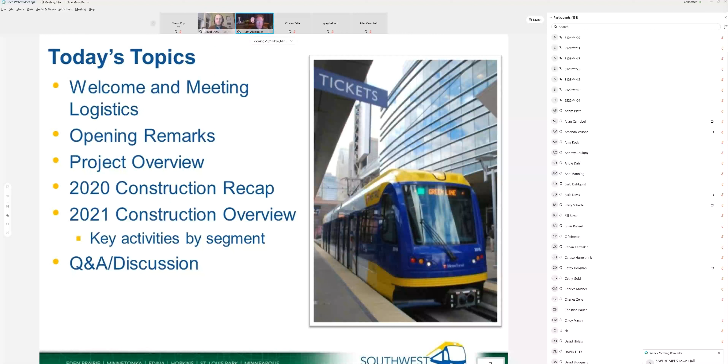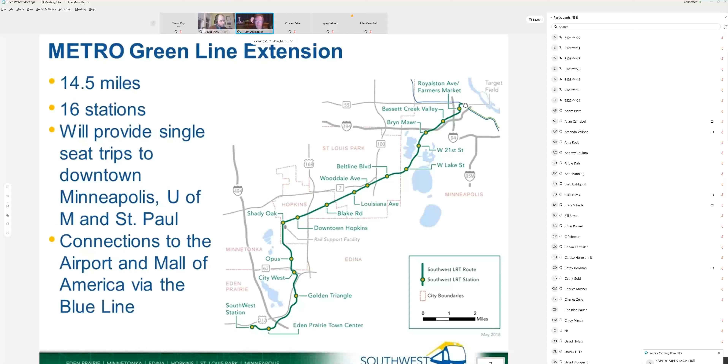We'll take a few Q&A as we go through, then have Q&A after we're done. As for meeting logistics, I'll just get right down to it. This is a familiar slide to a lot of you: 14.5 miles, as the chair mentioned, 16 stations, and what we're building. We're really focusing tonight on the Minneapolis area, so we'll get into where we are right now.

Looking at this LRT construction sequencing process, we really start underground, working at utilities, and ultimately lead up to testing. We're kind of in the middle of things right now with building structures, getting stations up, and working on track.

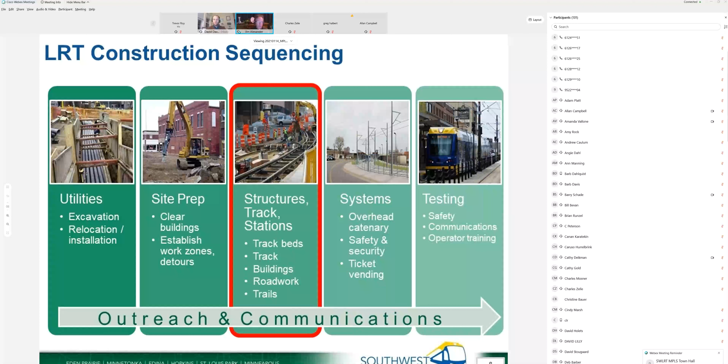And that'll be kind of the theme as well for next year. I'll go into highlights of 2020.

Just as the chair mentioned, we did receive the full funding grant agreement, the FFGA, in September. That was a big milestone for us.

Overall, the project is about 35% complete on construction. As the chair mentioned, if you have a chance to go out and look at the western suburbs, you'll see a lot of bridges out as you maneuver toward Eden Prairie.

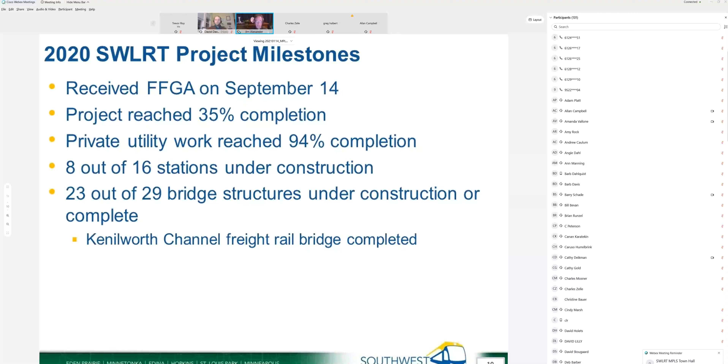One big piece we've accomplished is the private utility work. This is kind of a culprit, if you will, that really plagues projects like ours, and we're pretty close to 95% done with utility work. That's a big milestone for us. You can see the other stats here, as the chair had mentioned.

So we'll start from west to east. This is familiar for some of you - excavation of the Kenilworth Tunnel. We're going to talk about this tonight in terms of where we are heading in 2021. This is essentially the first cell construction being constructed.

You can see the waler, the struts here, and the walers on the side. So what you see is the sheet piles that have been driven in through here. We're pretty close to being done with all the sheet piles - should finish that up in February.

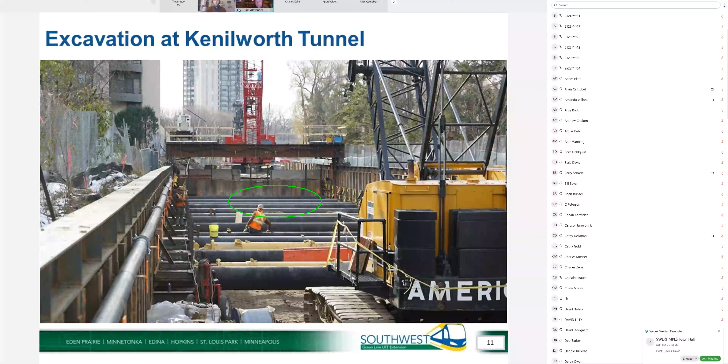We do have a segment that's next to the Calhoun Isles Tower and the garage that we're going to talk about. The Secant Wall you've been hearing about - some of you have been hearing about it - but that's the work on that tunnel thus far.

So, freight rail work - quite a bit of work has been done thus far. We shared a slide similar to this when we did the freight rail safety review back in September of 2020. Areas in green are the freight pieces that have been completed thus far, and in yellow are still to be done. We have the area where the tunnel is going, where we shifted the track to the east a bit.

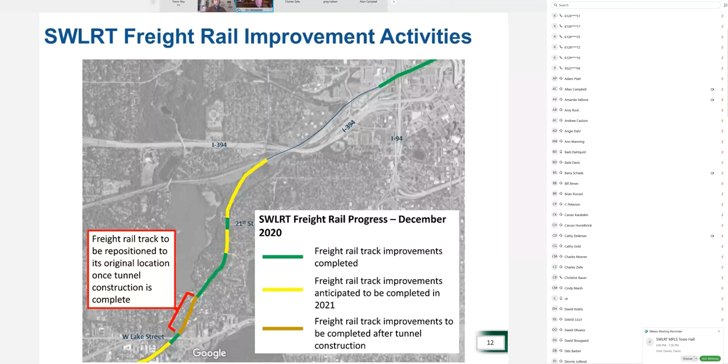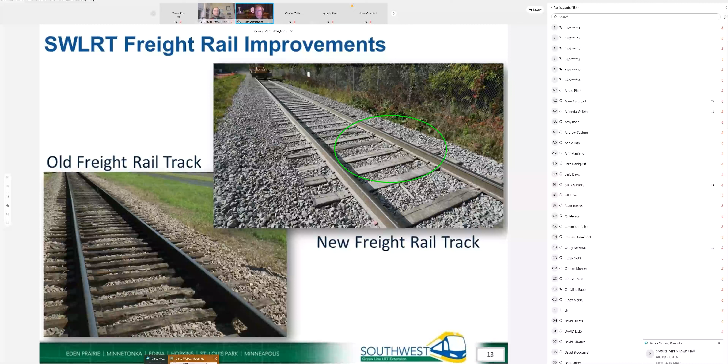We'll be shifting that back once the tunnel is all constructed. Here's an image of what that looks like - you can see the old track here, and the new track improvements with the new rail, the ties, and the ballast.

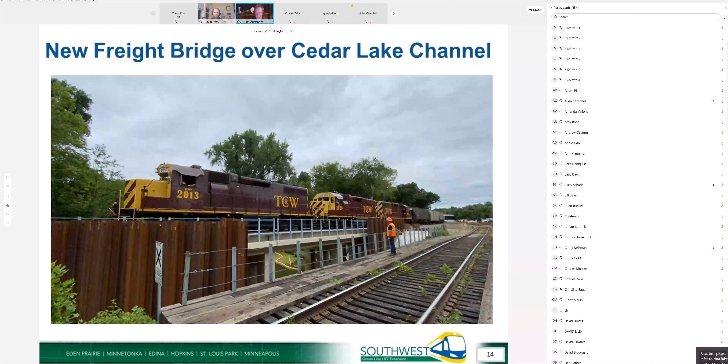So we really believe we're improving the freight rail infrastructure as we're building the SWLRT as well. This is a new freight bridge that goes over Cedar Lake Channel.

That was focused a lot of activity - I know a lot was disruptive with the pile driving on that. Where this inspector is standing, we're working on a bridge at about this location for the LRT bridge that's getting underway, and I'll talk about that as we get into the 2021 slides.

We're over near Glenwood. I wanted to spend a little time on this image here and focus on these areas. This is where the Glenwood Bridge was formerly located - it used to go across right through here. So we had to take that out to build what we're working on here.

We have retaining walls under construction on the north side, and we are currently building the bridge piers for the LRT bridge. At the end of the day, once this is all completed, there will be three bridges here.

There's a roadway bridge on the east side of Glenwood, the LRT bridge that will come through it - it'll be the same roadway grade as the roadway bridges - and then there's the west component of the Glenwood Bridge that ultimately will be built.

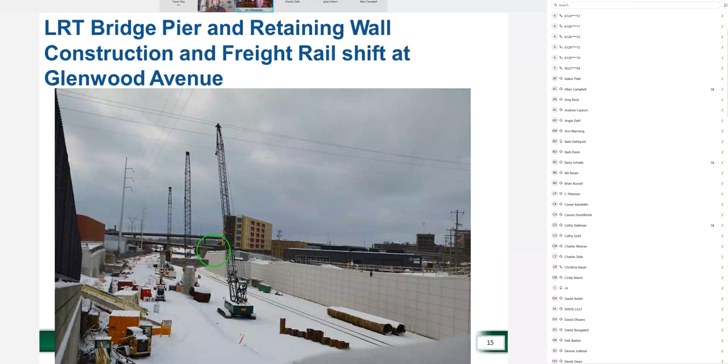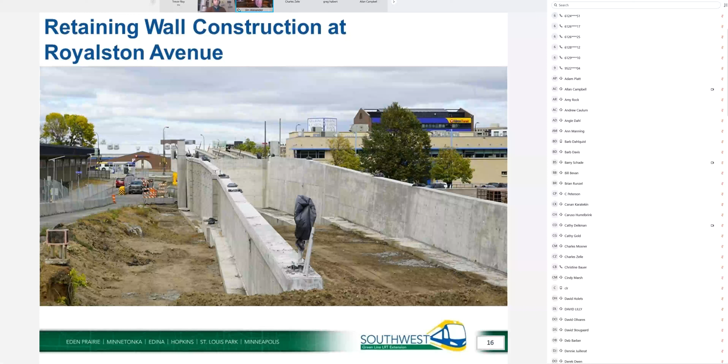Here's an image just north of the future Royalston Farmers Market station near downtown. We have a lot of retaining walls through this area, and off in the distance you start a bridge structure that goes over 5th.

This is another image where you can see Target Field in the background. This bridge structure will end up carrying LRT around Mary's Place and all the way over to Target Field Station to link up to our existing system.

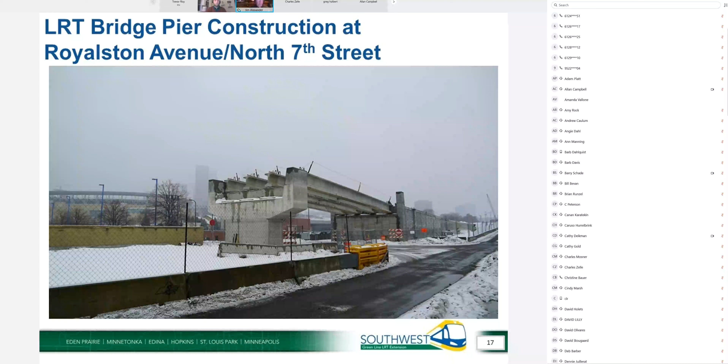In terms of construction communications, see the stats here. We've got nearly 17,000 subscribers, 46% open rate - a pretty good percentage, I'm told, by our outreach and communications staff. And number of hotline calls, 140 from Minneapolis in 2020. David Davies can attest, he's fielded many more calls than that, non-hotline calls and emails that we continue to receive and respond to.

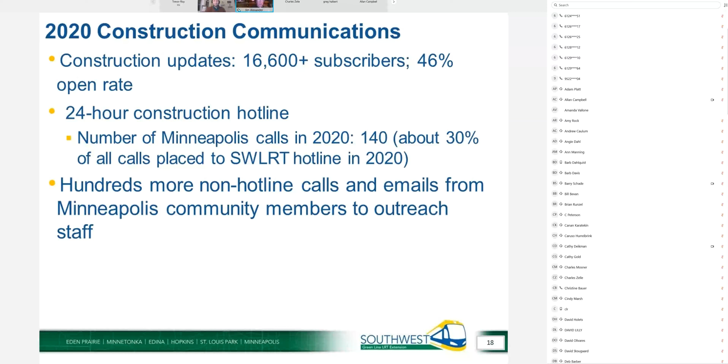So we'll get into the 2021 construction activity as we currently see this work laying out. We're going to work from east to west, starting out at the Royalston area, and I'll start with... let me see my slide here.

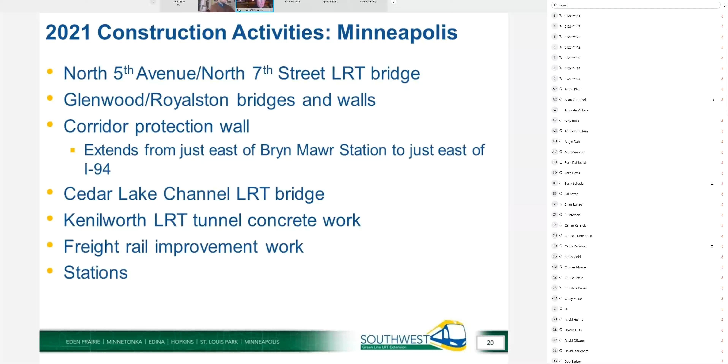So we're going to talk about some of these maps here, where I'll show a few of these and get you oriented on what all the symbols mean. The intent is to show areas where there's going to be more impactful activity. We're really looking to have activity along the whole corridor through Minneapolis as well as the other cities, but these are intended to show in blue where pile driving will occur, and in violet, where lay down and staging areas continue to be. We also have a symbol in pink - this is essentially a haul route, going along the whole corridor here.

And probably should have backed up - the green line and the yellow circles denote the line for Southwest LRT and the stations. So at the Royalston area, we'll have for that bridge that I talked about that goes over 7th here and makes its way into Target Field Station.

We'll have some pile driving happening in the spring and summer to finish out the piers on that bridge. As we progress towards Royalston, we have some laydown area up in this location, and we'll also be doing some work on the station itself, as well as retaining walls through this area. So there will be some pile driving activity up in that reach.

As we move down the Glenwood Avenue Bridge, one thing I want to point out is that we had anticipated to have this bridge up and running for our vehicle traffic later this year, and that is not going to happen given where we are with our schedule. We'll talk about the corridor protection barrier here in a minute - it's kind of coupled with that, but we are looking at least a year delay for that bridge. So we're focusing on 2022 to get those 3 bridges constructed and back in operation.

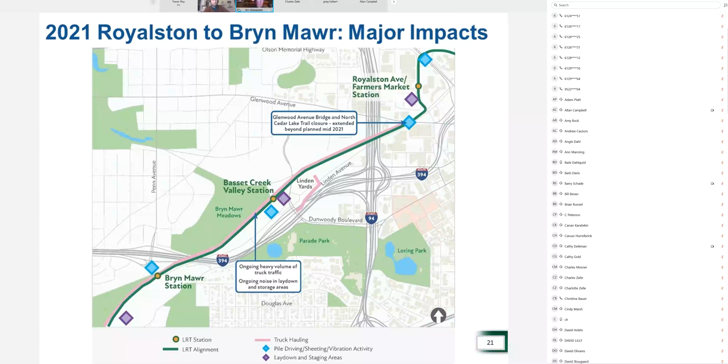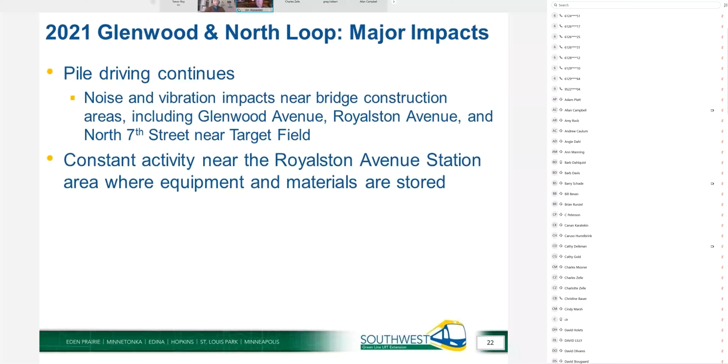So this is just a recap of the noise and vibration activities in the Glenwood area, the Royalston, and that Target Field, up in the Glenwood and North Loop area. There will be constant activity at the Royalston station, particularly working on those retaining walls that I spoke of. And then as we make our way toward Bryn Mawr Station up to Glenwood, certainly the pile driving, as I mentioned. Another piece we'll talk about is the corridor protection.

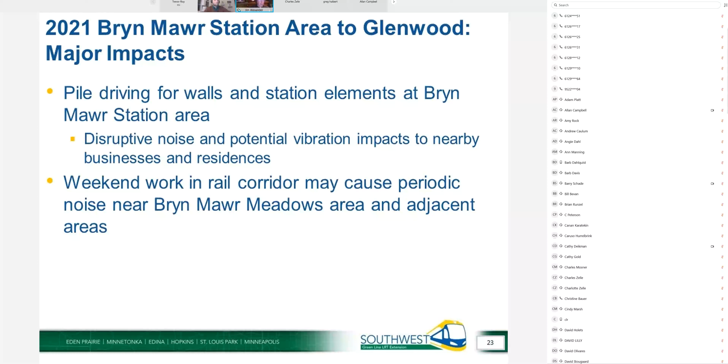We anticipate working weekends on that reach, essentially from Bryn Mawr Meadows, the Bryn Mawr Station, over to about that Glenwood area, to work on the corridor protection. And I've got some images to talk about that here in a bit in our PowerPoint slide.

This is a familiar slide that I think some of you may be recognizing. This is the Bryn Mawr Station, where we have the station itself here, and if I can move this - we have the vertical tower here that houses the elevator and stair, and then we have the pedestrian bridge that goes over to the bluff to the frontage road along 394. You can't really tell so much in this, but back in the background there are some retaining walls here. So we'll have piles to be driven for those walls and piles to be driven for this guy here.

And there's also up here behind the station that you can't see. To kind of get you oriented, if you've been out along the trail, this platform area is where that pile of dirt currently exists. That's a surcharge we've used to compress the soils, which helps consolidate the materials below where the foundation is going, so we don't have to do a deep foundation. We won't be doing pile driving for the station itself — we've essentially taken care of that with the surcharge, and we're able to do that just because of the nature of the soils at that location.

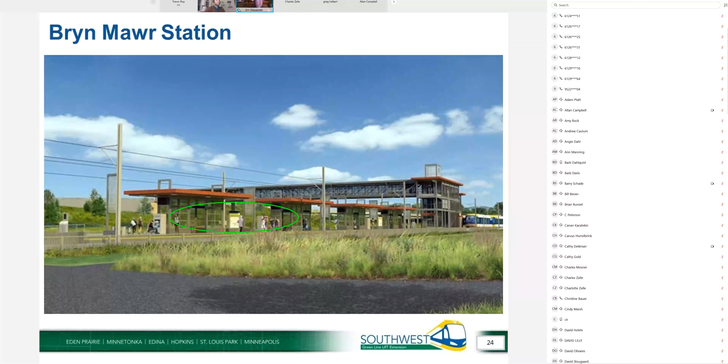So the corridor protection wall — this is one of the items that has caused us to take a look at our schedule. We're essentially looking at a pretty long reach.

It's — see if I can get my cursor to agree with me here. Hang on a second. Well, it's not quite — here we go. So I'll just kind of bring my cursor. I might change the color on this so you can see it. Well, that's a little bit different.

So the corridor protection essentially runs from Bryn Mawr Station all the way up past 94. Now, there was a lot of discussion.

I see Barry — I don't mean to call you out, Barry — but you were involved in what this wall is going to look like. At that time, we knew that BNSF, who runs their trains through this area, had essentially said if you're going to build on our property, you need to build corridor protection between their freight and our LRT. So we've now designed that from the structural perspective, but the aesthetics were already designed back when we had the community-led initiative in 2017, 2018. There might be questions about whether we're changing that — it's essentially intact from what that group did in terms of design. It's really more the structural ingredients of the wall that we've now refined.

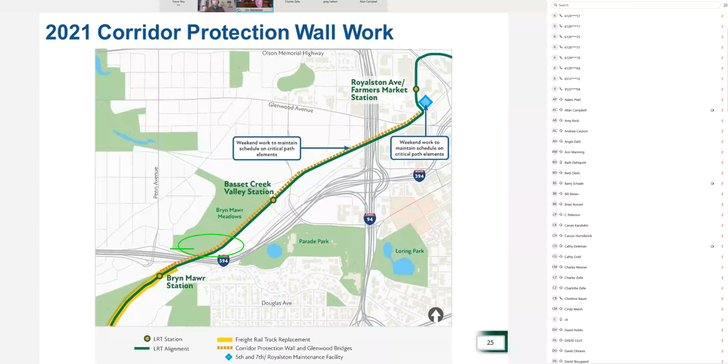So that's one of the pieces we're looking at from our schedule perspective, to understand the impacts, and we can take questions on that as we go. I see a lot of questions popping up here — we'll get to a moment where we can pause. But it's this reach where we were looking to do weekend work, so we can really improve upon the schedule as we work through that element.

These are images from that study, from the input we got. This is essentially the Bassett Creek Valley Station near Van White, showing the wall, and we'll have this labeling here to give folks a picture of what this looks like. Let me see if I can get my oval to work here again.

Our construction work area is essentially in this zone here, and we're very, very tight. We have freight rail running through here quite a bit — quite a number of trains every day. Here's the wall itself, the LRT next to it, and we have to deal with drainage as well — not a lot of room. That's one of the challenges of building this corridor protection in this area.

As we've been working with our contractor, we knew freight rail was going to be a challenge to work against with all the work we have to do. But really seeing it firsthand as we've experienced the BNSF activity and the TC&W train activity, we have a better understanding of what those impacts mean to the construction. We're using that data to help us navigate the construction for this corridor protection.

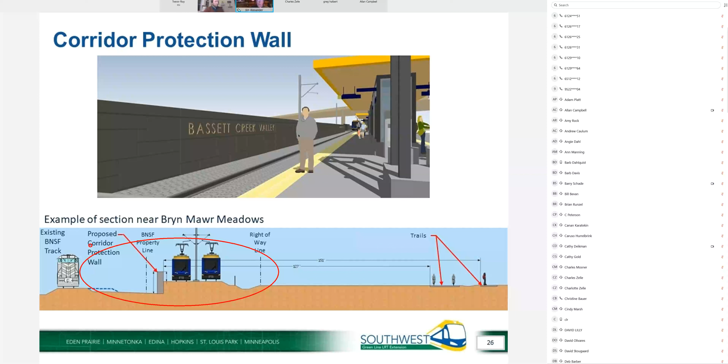So David, I will pause there and see if we can take a few questions. Sure thing, Jim — going back up a little bit, there's one about delay, referencing soil, but I think just taking delay in general: does it delay the reopening of the Cedar Lake Trail?

Yes, thank you. Good point. Yes, yep, I should have mentioned that.

So coupled with the Glenwood Avenue bridge, that trail essentially goes with it. As long as we're building that bridge, or those three bridges, it's not really safe to have the trail come through here, which I think is what the question was asking about. So we've implemented an alternative detour that we believe is a bit more efficient for folks to get in and out of downtown. It still cuts off just short of Van White, but goes along Dunwoody and up Hennepin into downtown.

If you all don't know about that, David can direct you, but we should have that on our website. David, you can maybe help direct folks to that.

This is getting down into the details, but just in terms of extending the corridor protection wall, Jim, I think you were talking about how it runs from Bryn Mawr east to Royalston. Does that corridor protection extend down into the Kenilworth corridor? Well, essentially, no, it runs from just east of Bryn Mawr Station all the way up into the Glenwood area.

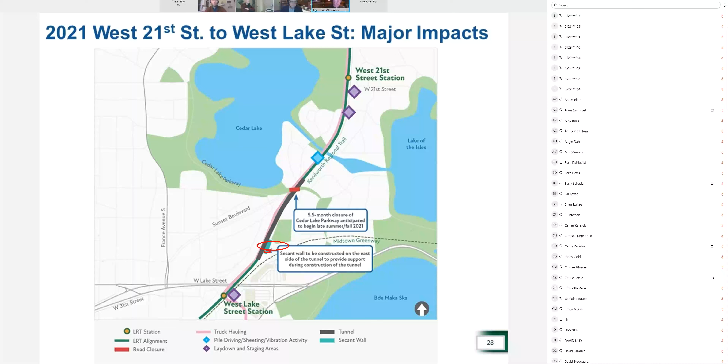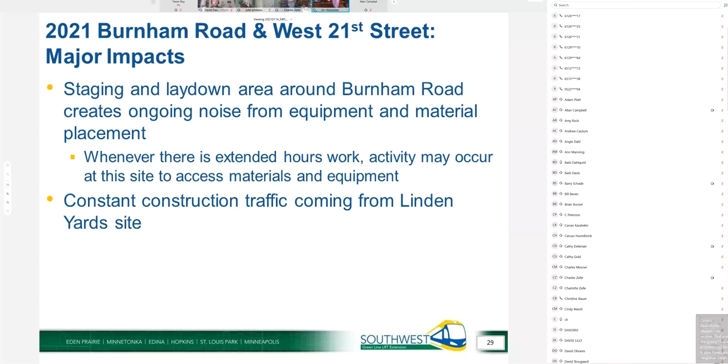So here's just in words here the work that transpires. Now I want to talk about this extended hours a little bit as we get into the concrete work that we're going to be talking about in a subsequent slide. But maybe before we go there, this is the 21st Street Station.

At this location, there was formerly a surcharge, another pile of dirt, if you will. Now you'll see there's a bunch of conduit sticking out of the ground. The contractor anticipates doing foundation wall work and some of the vertical structure work as they get into this year, and this is really going to be picking up in the spring and summertime.

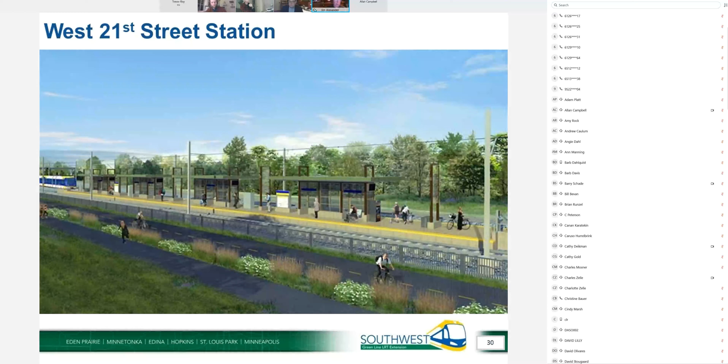And we talked about this in terms of the pile driving for that north abutment. So I want to talk about the tunnel construction a little bit.

Essentially, this is going to be built in a series of cells. There are 31 cells along the approximately half-mile length of the tunnel. In each of those cells, first we need to excavate and then fill the bottom up with what's called a concrete seal. What that does is seal off the groundwater from outside of those sheet piles you see out on the alignment, and essentially provides a dry area for the contractor to build the tunnel itself.

Now we need to do these seals in one pour, and they take quite a bit of time. It's about 1,300 cubic yards, so that means there's about 130 trucks coming through to pour the concrete at each of those cells. We anticipate there would be one concrete seal pour about every 3 to 6 weeks. We'll know more as we get into this first one in February, in terms of how many hours it's really going to take.

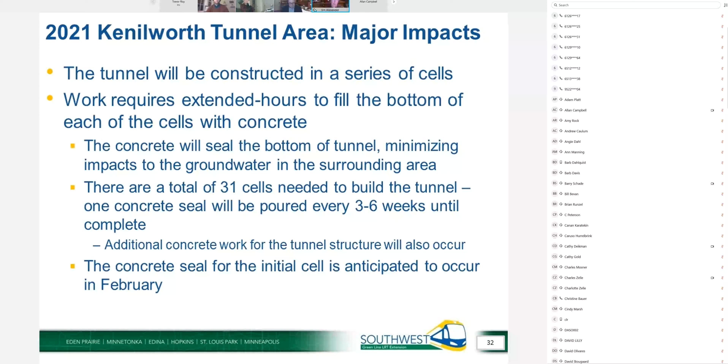We've essentially directed the contractor to double up on the pumping activity. I've got an image here to show, and we work with the contractor on this.

We've been really trying to zero in on how long this is going to take. We do anticipate some after-hour activity, but we think we can contain most, if not all, the concrete placement within normal work hours, which run from 7 to 6. So it's very possible we'll have to run a little late to do cleanup before the contractor can wrap things up. As I said, the first pour is going to happen in February.

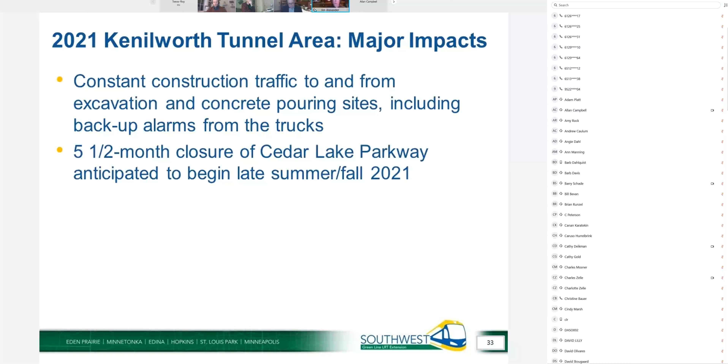We worked out an arrangement with our sister partner at the council, the Met Council Environmental Services, that we'll be discharging the water from these cells into the sanitary sewer. Some of you may have heard that in the past we had thought we were going to discharge this into the channel or into the lagoon area just east of the channel. We've worked out that we can get this into the sanitary sewer instead, so we will not be discharging into the channel, into the water body.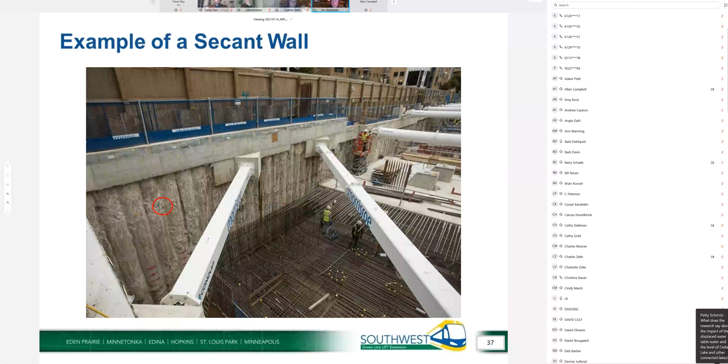And we covered that slide. We'll kind of step down to Westlake Street area. So we are doing a lot of coordination with other projects, specifically the Westlake corridor, where they're looking to build another apartment tower at that location. They're going to look to close the north end of that Abbott-Chowen loop.

And the intent is that they need to do some utility work in that area, so it's going to be closed throughout '21 once that begins in the spring. We'll be able to give you updates as we progress throughout the year to understand when that traffic can get back connected eventually.

So we are also coordinating other construction activities in the area as they come online, continuing to meet with the county and city staff to understand what everybody's doing out here. I know there was concern back when we originally had the Cedar Lake Parkway closure, and we're really trying to stay on top of that to make sure that we're all on the same page. Other areas, the staging and laydown area that I mentioned will have a similar situation down at that area of Chowen and Abbott near West Lake Station.

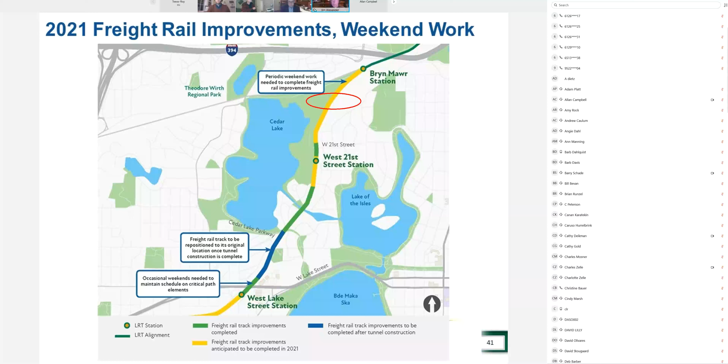I'll be the first to acknowledge the challenges and disruption we had with the Labor Day weekend closure, and the work we did overtime in the evenings. We don't see the need to work evenings for these segments, but we will have to work weekends to get this accomplished. At the end of the day, this will be a much improved segment for the freight rail, and as you saw in that image, it really enhances the safety of the station. Similarly, due to the confinement of the Westlake Street area under the bridge, we'll need occasional weekend work at these locations as well.

So, David, I'll pause there for some questions. Sounds good. We are going to back it up to the West 21st Street area and work our way back down a little bit.

We had a question earlier about corridor protection, specifically from Cedar Lake Parkway to West 21st, maybe amending that to when the train comes out of the tunnel, since freight and LRT are separated up to that point, up to 21st. Given that electricity and fuel don't mix, and there's a whole neighborhood of people living there, to what extent do we have corridor protection? Is there a wall between the LRT and the neighborhood? What does that area look like in terms of corridor protection?

In terms of corridor protection, going to our design criteria for less than 25 feet, we do have corridor protection at this location, where essentially LRT comes out of the tunnel and ends up crossing the channel on the bridges. Similarly, as we get into the tunnel on the west end, we have corridor protection at those locations.

We had a question from Representative Hornstein about soil issues around the Secant Wall. Does that affect the freight rail? How do the soil issues and the Secant Wall impact the freight rail coming through the corridor, and associated safety issues? Good question.

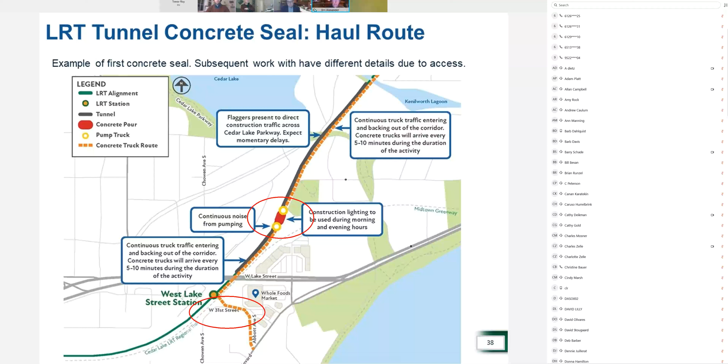But I would add that there's still concrete to be done, because if we go back up to the tunnel structure, we have concrete to place for all the walls, the roof, and the base. But that doesn't anticipate that we'd have that multitude of trucks at any one time. For this concrete seal, it happens to be 100 feet in length. Generally not all cells are 100 feet in length, but most are, and that's where we have the greatest quantity. So this will be poured once every 3 to 6 weeks - it's not a daily activity.

Okay, we'll take a couple more from the chat on this segment, then we'll segue into Q&A for the overall corridor. But wanted to get to this one since we were just talking about pouring days, Jim, and the Tremie seal, about the displaced water. Is it getting pre-treated before going into the sanitary? And is there a way to ensure the rate of discharge doesn't exceed the sanitary capacity?

Yes, I might need a little help from Andy Caulum, our resident engineer, but I'll try to answer part of that. I know we've been working very closely with Met Council Environmental Services on both the quantity and the quality of the water in terms of what goes in. Andy, maybe you could speak to what we're doing in terms of turbidity.

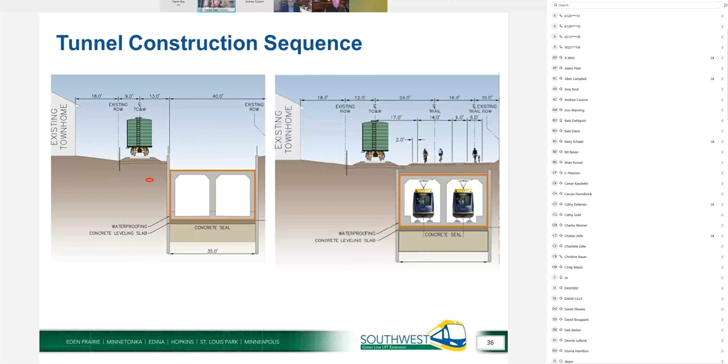Jim, did you want to take a run at that one? Maybe you could take that, Andy. Yeah, I think what's important for that concept is that we're putting the seal in to stop the groundwater from percolating into the excavation or into our work zone. So essentially it's not a constant discharge of groundwater - it's localized, it's contained. There's virtually no water coming into the cell once the seal is placed. So my understanding is that there's no impact.

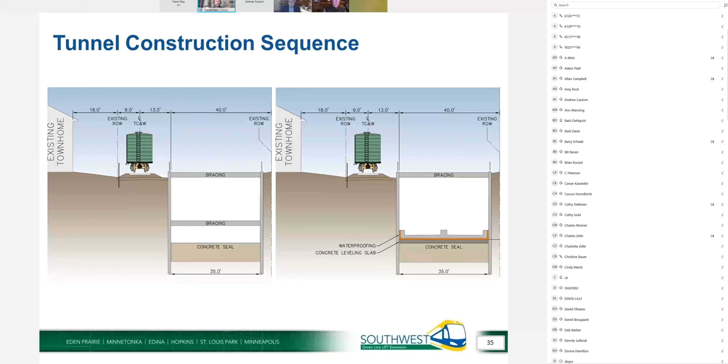So there was one more I wanted to grab: a question about pile driving at Westlake Station, the loudness and impact, and verifying the type of pile driving that's going to be done. Yes, I should clarify that we will not be doing pile driving at this station. We can do what's called an auger cast pile, essentially drilled into the ground and filled with concrete. This drilling equipment is not exceptionally noisy compared to the vibration and noise from pile driving activity.

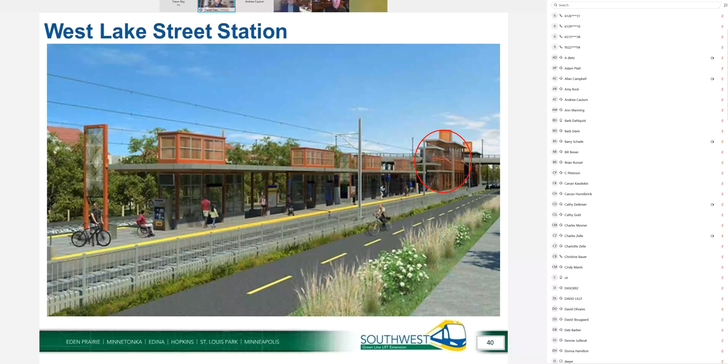This is Jeremy, I don't have a way to raise my hand on this screen. So if I wave like this, will somebody notice?

That'll be hard, Jeremy, considering I can see about 5 people at a time while we have a presentation up. So just as a reminder, let me get to the next slide here. Everybody's doing a great job muting. To raise hands, we're going to switch back and forth, starting with chat and going to raised hands. Hopefully everybody can see this. But there is no way on my screen to do a raise hand. Okay, using the WebEx client? I'm not on the web browser version, I'm on the app that was downloaded.

Well, we'll try to get as many as we can, Jeremy, including you. But for those on the browser, next to your name there should be a hand icon - if you highlight your name, you should be able to click raise hand. Tom Beaumont just was able to do it, and then he put his hand down. Those pop up to the top of my screen. If not, we'll check in with people intermittently too. Got a lot of questions, clearly we're not going to get to all of them, but we'll get as many as we can, so let's get right into it.